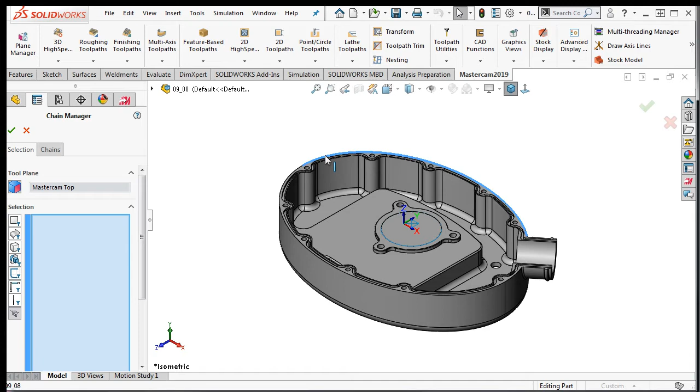I'll select the Tool tab, then select Library Tool, Filter. I'll clear the selections and then select a 1-inch flat bottom end mill.

I'll set the cutting speed to 1100, the feed per tooth to 0.01, enable the rapid retract, set the plunge rate to 50, and I'll add the comment face top of part.

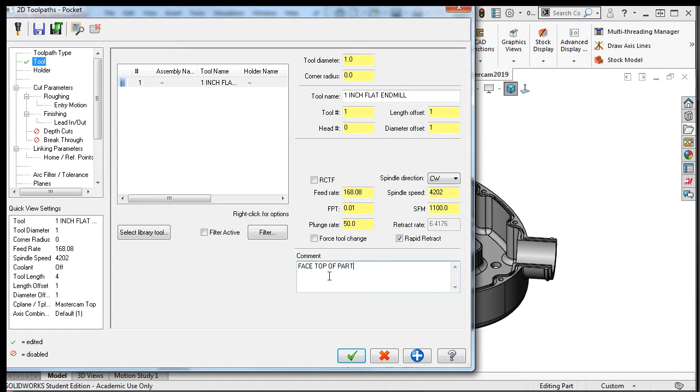I'll select cut parameters, and as the pocket type, I'll select facing. I'll make the overlap 70% of the tool. Make both the approach and exit distances 1 inch. Remove the stock to leave on walls and floors.

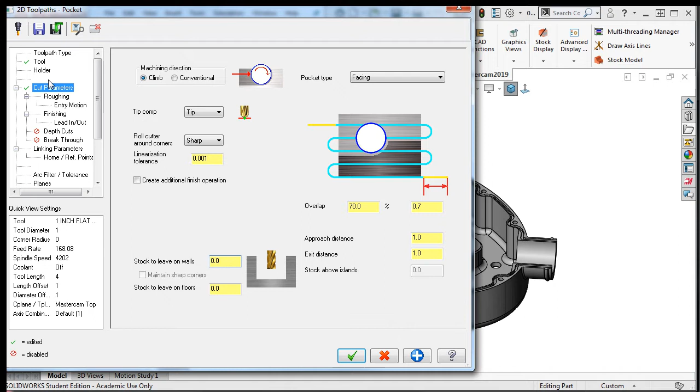And then select the roughing tab. I'll ensure there is a check in the roughing box. Select the zigzag pattern. Set a 70% step over. Then select the finishing tab.

I'll enable the machine finish passes only at final depth and finish the outer bound. I'll make sure keep tool down is unchecked. This is because I do not want the tool to wrap through the material outside of the part profile.

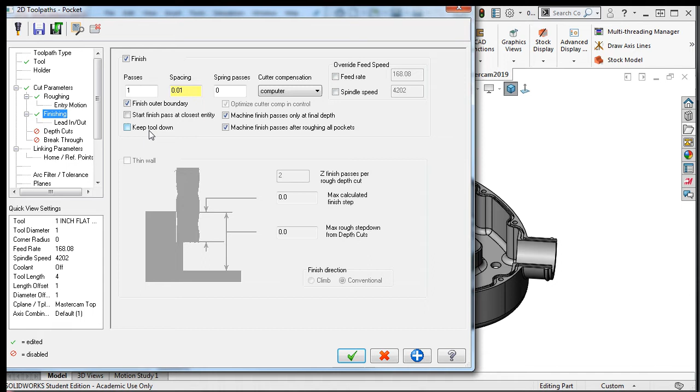I'll select the depth cuts, enable the checkbox, and add one finish pass at a depth of 0.015, since there's only 0.05 to come off the top. I'll turn on the flood coolant

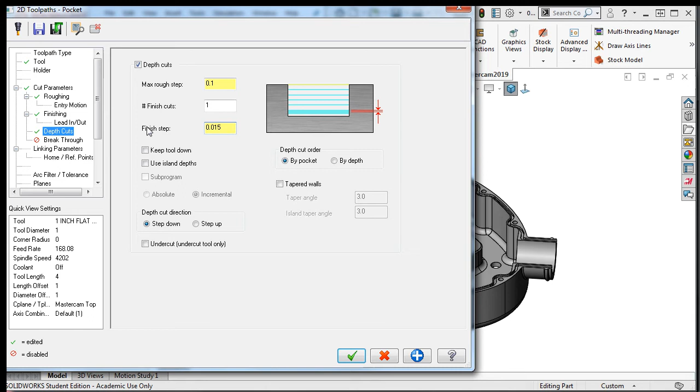and accept these selections. Notice how the cut lines clean up the entire top surface, but only to the extent of the part profile, not to the extent of the stock. I'll verify this toolpath.

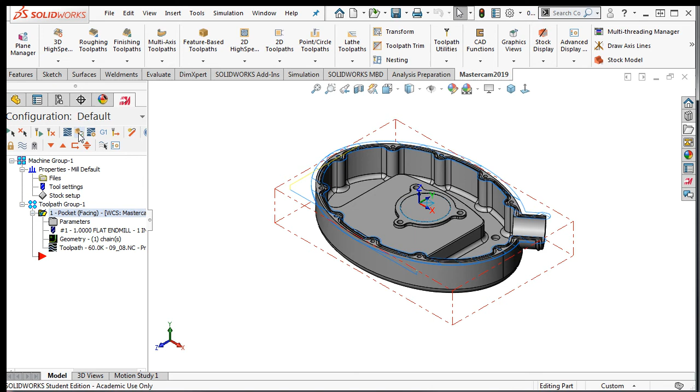This looks good, but I'll rewind the simulation and step it to see how the tool enters the cut. I can see that the tool does plunge into the material, so the default helix rough entry failed. That's fine since the depth of cut is only 0.035 for the rough pass and 0.015 for the finish pass. I'll exit the simulator and save my work.